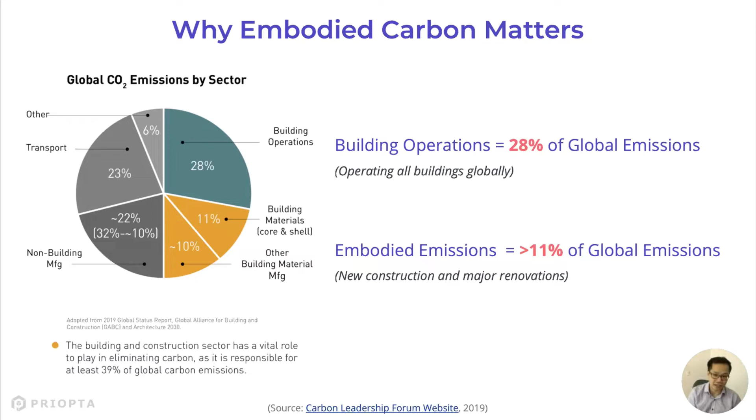But there's some recent estimates that are looking at the other building materials in there as well. So some estimates show maybe it makes up about another 10%. With a lot of these emission figures, it's a bit challenging to figure out how you slice it up in the right way sometimes. But let's say it's at least 11% of global CO2 emissions is embodied carbon.

Now, I want to zoom out a little bit to get a high-level perspective of why all of this stuff matters. When the IPCC came out with their climate change report on limiting global warming to 1.5 degrees Celsius, here's some perspective on what it actually takes to hit these climate targets. So if we were to hit our 1.5 degree scenario target, that means this year, 2020, we need to peak global CO2 emissions. By 2030, we need to halve it. And then by 2050, we need to get to zero, and then we need to go negative. So that's the scale of how significant these emission cuts are.

And to put it in more practical annual terms, to hit the 1.5 degree scenario target, every year we need to reduce global emissions by 7.6% per year. If we went for the less stringent 2 degree target, that's 2.7%. And many of you may be wondering, given the pandemic and us stopping all the planes and all the stuff in the world, what's the emissions impact of that? The latest estimates that I've seen are from the International Energy Agency, in late April. Their projection for this year is an 8% reduction in global CO2 emissions. So think about how drastic these emission cuts are, by basically stopping big sectors of the economy. That's getting us 8% for this year. So it gives you a sense of the task at hand.

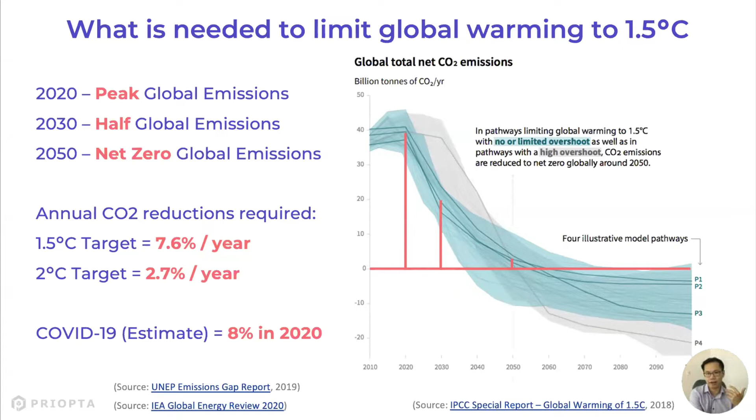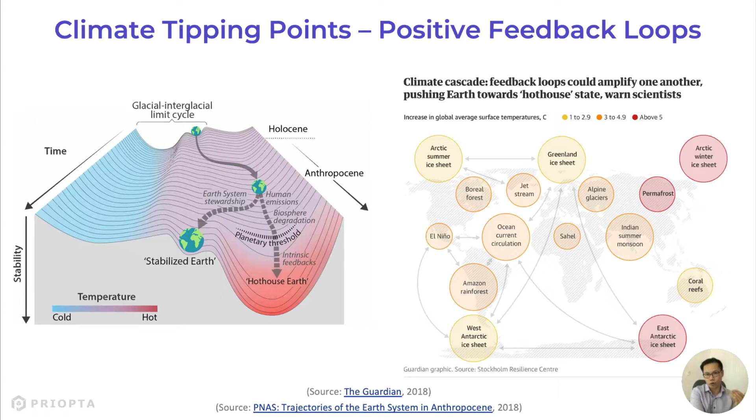Now, another thing to think through is that these scenario targets oftentimes don't include tipping points or positive feedback loops. If we set into motion some of these larger natural forces like the melting of the ice sheets or pausing the ocean circulation currents, all of these can have positive feedback loops, which make it even harder to stabilize the climate, which means it's really important to look at when those emissions reductions take place. And that's part of why there's been a lot more focus around embodied carbon lately, because these emissions are happening upfront, they're happening early, and they have a big impact on whether or not we hit these climate tipping points in the immediate term. So it matters when these emissions take place.

And to give you some perspective, this is not just a hypothetical thing. In British Columbia, our wildfires in 2017 and 2018 were equivalent to 3 times all of BC's total annual emissions. And same thing with Australia. Last year with the wildfires in Australia, projections were that they would release 900 megatons of CO2. So that's equivalent to double all of Australia's emissions. And so we really need to be cognizant of not tripping over these tipping points.

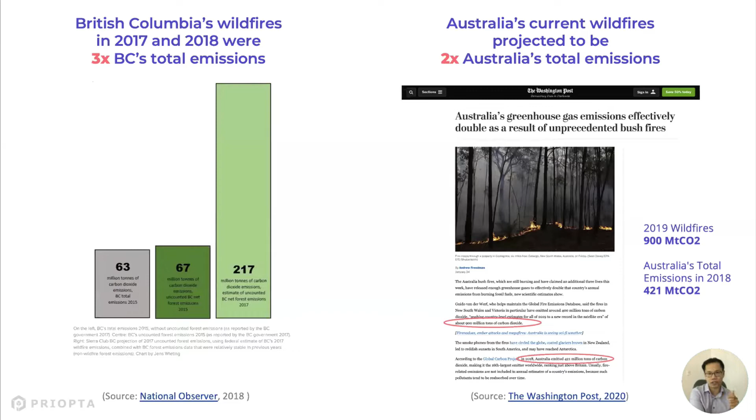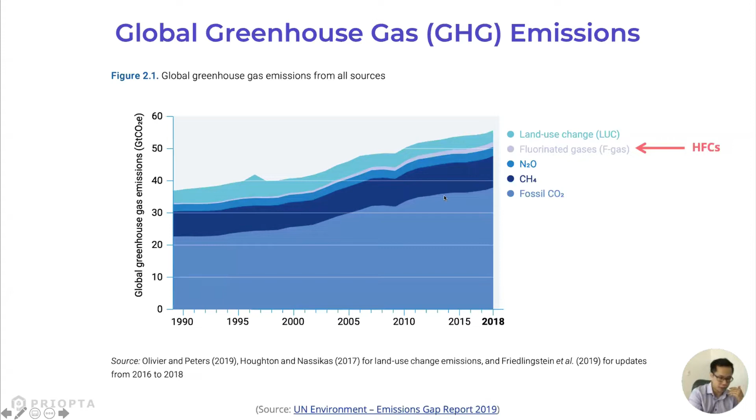This is important because even though that seemed like a very small slice compared to everything else, fluorinated gases are actually the fastest growing source of greenhouse gas emissions. So if you actually look, comparing that to just overall GHG emissions, CH4, which is methane, or nitrous oxide, fluorinated gases are increasing at a rate of about 4 to 6% per year. This was the average over the past decade, basically.

And so that is so significant that it could, by itself, raise global warming by 0.1 degrees Celsius by 2050 and increase 5-fold to 0.5 degrees Celsius by 2100. And so that's why when the Kigali Agreement came in, there's been a big global effort to limit these and regulate these emissions. It's because these are some of the most significant and potent gases from a climate change perspective.

Now, if we actually look at the fraction of greenhouse gases that stay in the atmosphere over time, this is something that people may not fully appreciate. So when we're calculating embodied carbon, when we're doing a life cycle assessment, the environmental impact category that we're looking at is called GWP, global warming potential. But there's actually a time horizon perspective. And so almost every emission statistic calculation that you look at, it's referring to GWP 100.

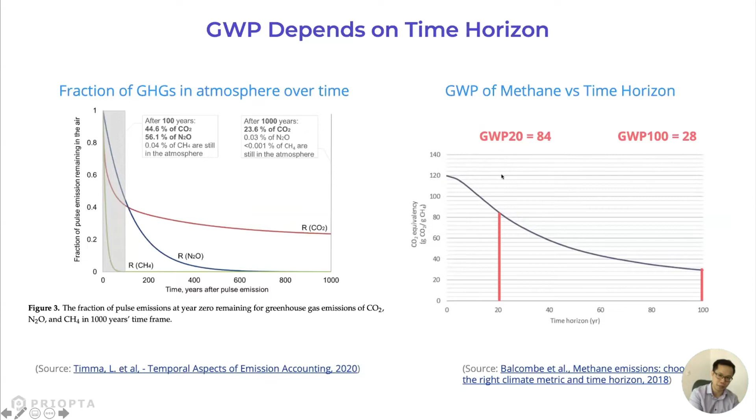And so this is true not just of methane, but also for refrigerants. So HFCs, which are basically these refrigerants. So when you say R134A, that's the same as HFC 134A. You can see that the 20-year time horizon for these figures is about 2 to 3 times higher. And these are not the typical figures that you'll see.

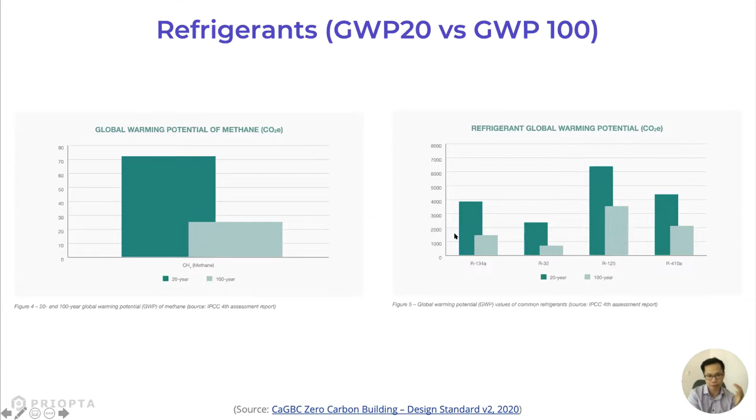It's important to note that the atmospheric lifetime for most of these HFCs is under 20 years. So you can see, for instance, R134A, the atmospheric lifetime is 14 years. So some may argue that it's also useful to look at the GWP 20 numbers in addition to the 100 numbers. That's not to say that this is like an accounting error or something.

There's a reason why we do look at the 100-year time horizon, and it makes sense because there's many different gases, some of which last much longer than 100 years, some of which don't last as long. But it's just something to keep in mind.

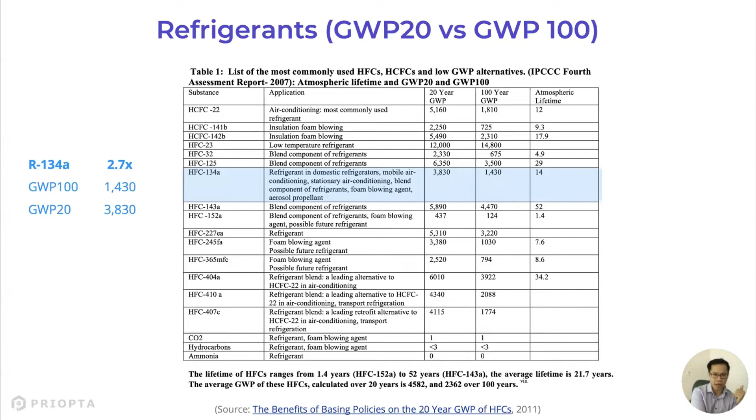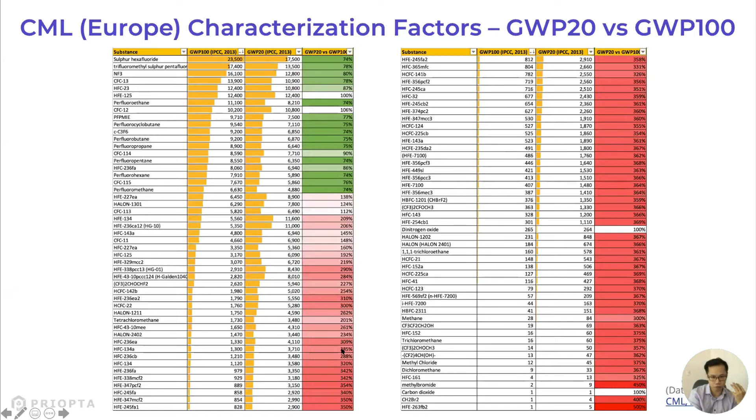And that also means that if we limit these emissions, we can actually have a very quick impact on the climate, because these are short pulses of emissions that can quickly decay through the atmosphere and reduce. That means when we stop emitting them, there's less kind of momentum.

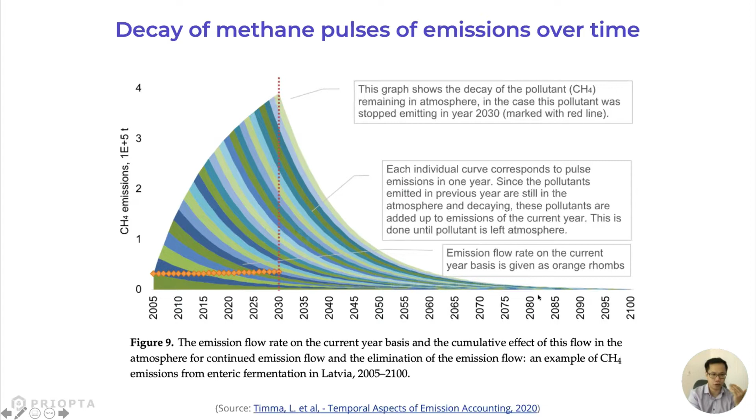The global warming, the radiative forcing limits. And so the reason why I kind of got turned on to this topic was this book called Drawdown, which is a big comprehensive research effort to look at what are the top solutions to global warming. And what's surprising is that while most of us think of things like solar or wind, the number one solution that they illustrated in their book was refrigerant management.

And what they're trying to look at is between 2020 to 2050, so over the next 3 decades, what has the greatest potential for greenhouse gas reductions. And so what they're showing here is 89 gigatons of CO2 removed. So that's equivalent to something like 2 years or so of global emissions just from refrigerants, phasing this down. So it is a very significant thing.

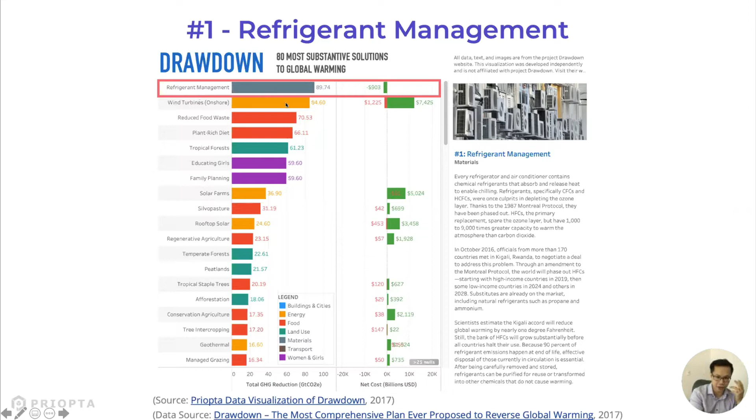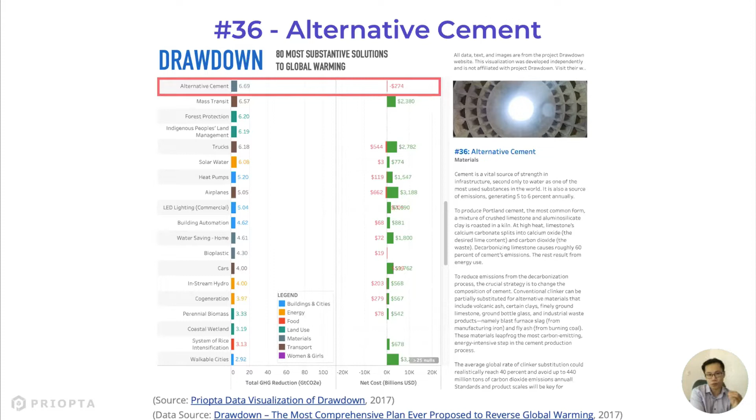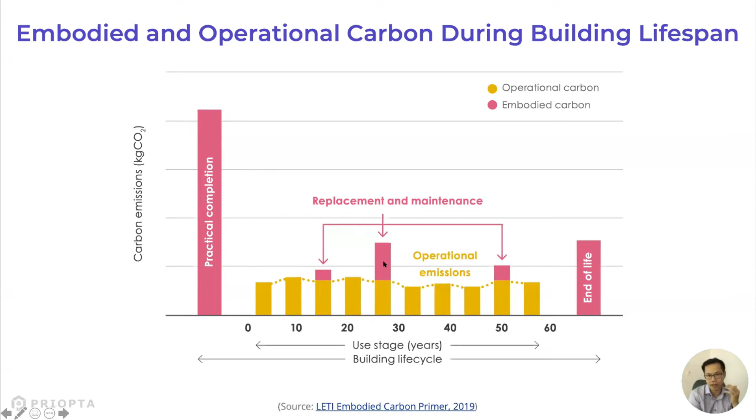Now, when we're looking at embodied carbon, comparing embodied versus operational, this is the typical lifespan of a building. So over a 60-year lifespan, you have the yellow emissions, that's the operational carbon emissions, heating and cooling the building. But on the embodied carbon side, that's all the red emissions. There's a big pulse of emissions that happen up front when you build the building, and then a little bit during the maintenance and replacements, and then a bit at the end of life as well.

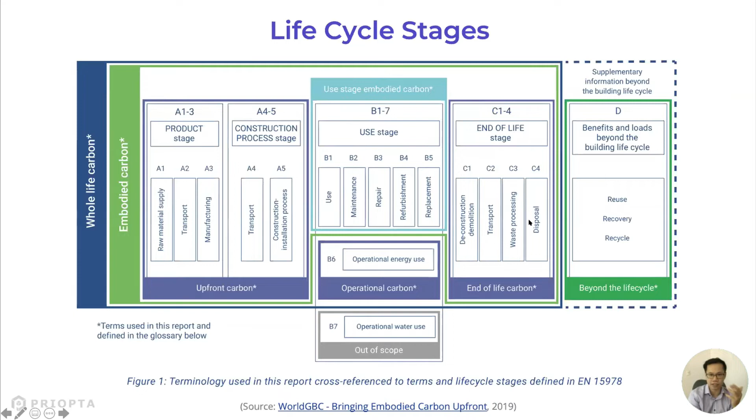I'm just going to skip over some of these slides, actually. So now embodied carbon, let's look. I want to give you some sense of the scale of these emissions. So this was a study done by Athena that looked at 10 multi-unit residential buildings. The average across those 10 buildings was 318 kilograms of CO2 per meter squared of floor area. And on the operational side, with the City of Vancouver's rezoning requirement, the operational GHGI is between 5 to 6 for residential buildings. So each year to operate the building, between 5 to 6. Embodied upfront, that's like 318.

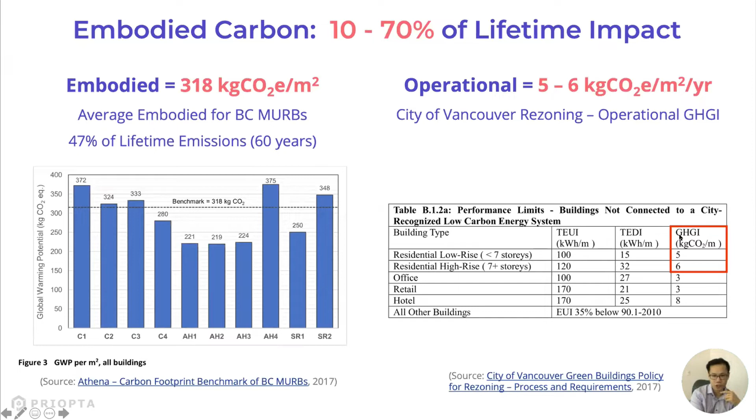Now, granted, on the operational piece, those are really low numbers. That's reflective of near passive house level performance and fuel switching to electrification, and we have a fairly clean electricity supply, mostly hydro in BC. So that's how you get these really low numbers. And obviously these can vary significantly.

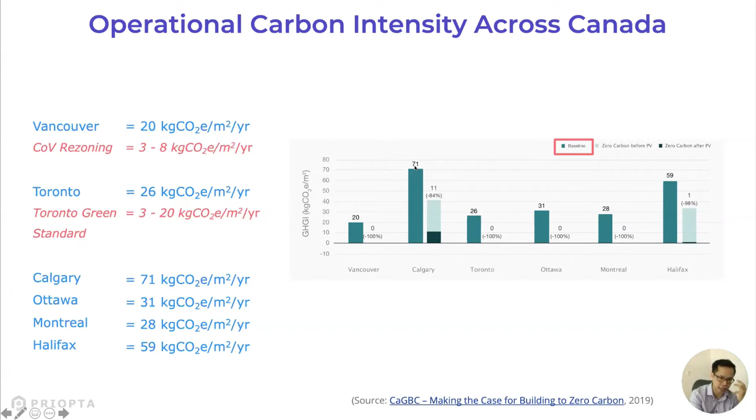A baseline building that wasn't particularly high performing, maybe closer to 20 kilograms of CO2 per meter squared in terms of operation each year. Whereas a city like Calgary, which has a different climate, higher carbon electricity intensity, and also they use natural gas for heating, it can be as high as 71 each year, right? So that's on the operational piece. Know that these emissions can vary significantly. But same thing with embodied, right?

So this was a study that was done by the Carbon Leadership Forum. They looked at over 1,000 LCAs from around the world. And you can see the ranges of these emissions by different building types. Many of them fall in the 200 to, let's call it 600 range. And they can go as high as 1,000 kilograms of CO2 per meter squared. So this is a whole building basis.

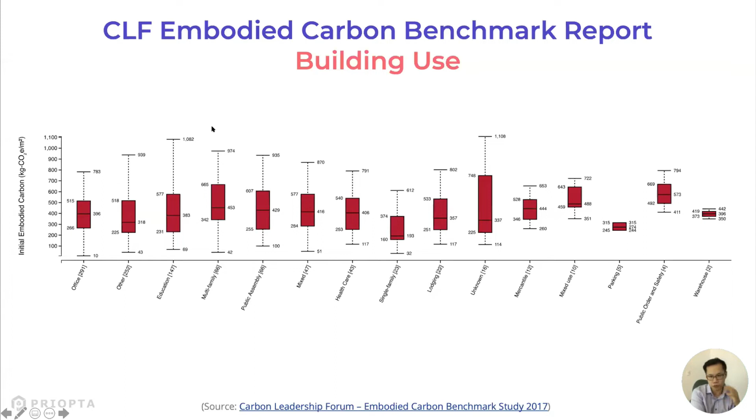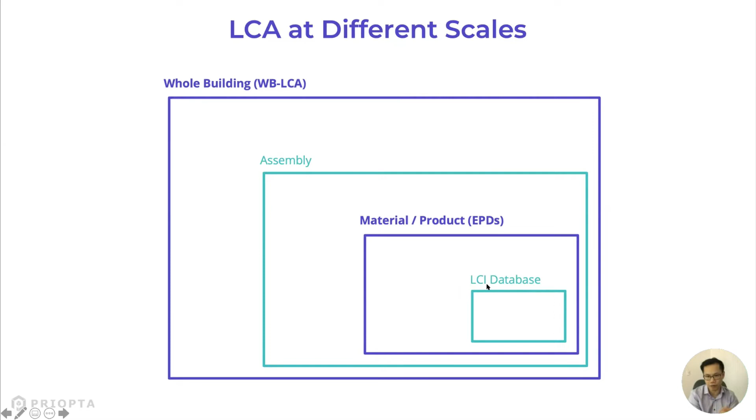And so there's different scales at which we can look at these LCA studies. We have the whole building level. You can look at the assembly level, so looking at just a wall assembly. You can look at individual products or individual materials, and that's where EPDs or environmental product declarations come from. And those are calculated using a life cycle inventory database, so sort of a background database that they draw from.

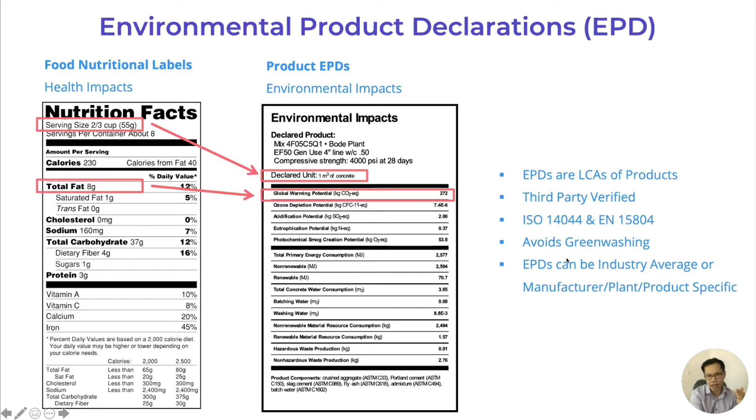And so if you're not familiar with environmental product declarations, it's sort of like a food nutrition label for building products, but instead of looking at health impacts, we're looking at the environmental impacts. So we look at not just the embodied carbon, which is called global warming potential, but we also look at things like ozone depletion, acidification, eutrophication, smog formation. These are third-party verified LCAs, basically, of the manufacturer. So they can say per unit of my product, what's the emissions associated with it. It avoids greenwashing, and these EPDs can also happen at the industry average level and also on a manufacturer-specific basis.

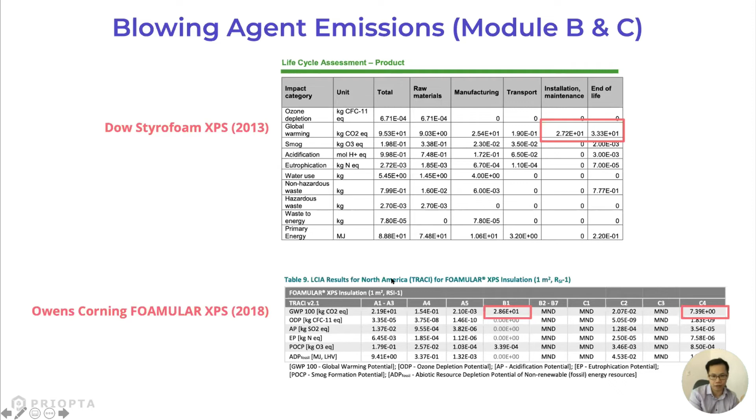And most EPDs that you see, oftentimes they're mainly focused on the A1 to A3 phase. So that's accounting for the resource extraction, transportation to the manufacturing facility, and then the actual manufacturing and processing. That's A1 to A3. For the vast majority of materials, that is where most of the emissions are. However, in this particular instance, it seems like the off-gassing of the HFCs during Module B and then Module C at end of life are actually more significant than the A1 to A3 emission impacts.

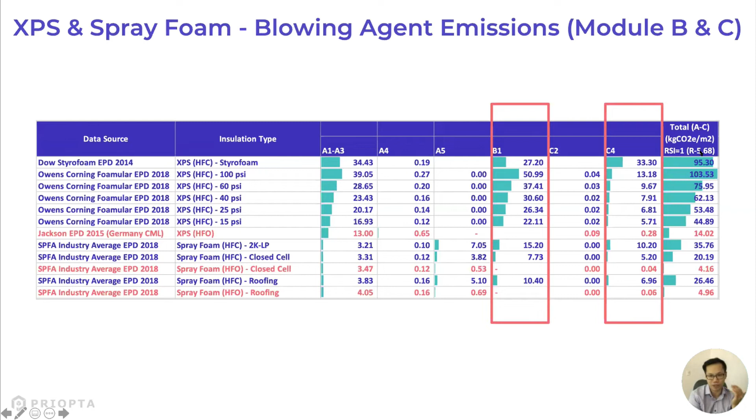And so I've spent some time investigating this, and I was very surprised because I couldn't see these numbers reflected in our whole building LCA results, which typically show that most whole building LCA results are between 200 to 600. At the outer edges, it might be 1,000. But to see the insulation itself this high, I hadn't seen it reflected in Athena before. And so I reached out to Athena and also to Tally and also to One Click LCA.

And my sense is that all three of those providers, in terms of the standard XPS values that they have in there, they're about 10 times lower than what I'm seeing from the Owens Corning and the Dow EPDs. And my understanding from their explanation is that this may be due to use of old XPS data that's from Europe. And in Europe, I believe they have regulation where they've already banned a lot of the HFCs. And so those numbers are significantly lower.